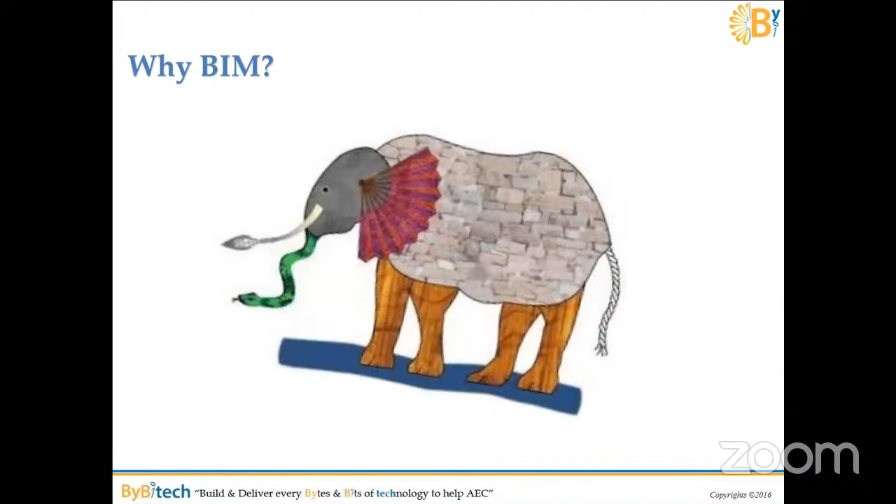So just think about this drawing. If I give you 2 drawings, one is rectangle or square, another one is circular, and if I ask you what is the shape of the object, you need to imagine that one. Then we don't have confidence on that.

So what happens here? Now, when I show the 3D object, then I ask you what is the shape of the object, you can immediately say what that is.

So when we have 2Ds, we imagine everything, we don't have confidence, then we go and get confirmation, or we construct as we understand it. Then at the end of the day, a lot of variation orders happen, we need to update a lot of things. So this is the current situation when we are using especially the 2D drawing without any technology.

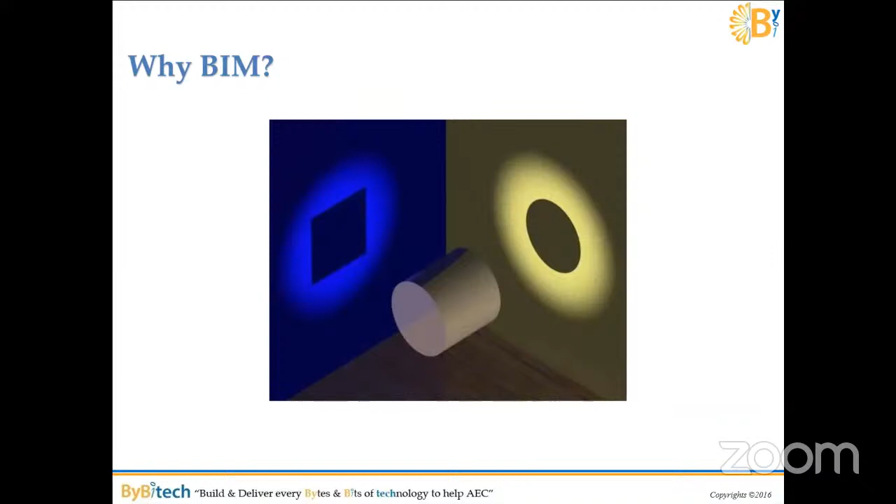Now we are going into BIM. Why do we need BIM? Okay first, what is BIM? Building Information Modeling. So I want to explain the three parts: building, information, modeling.

Okay, building - take it as a verb, okay, not a noun. Buildings, everything is building. Sometimes people say building information modeling. I heard this a few years before - road information modeling, bridge information modeling. Then they decided, okay, building means everything. Infrastructure is also building, road is also building, tunnel is also building. Consider buildings also building - it's not like building only means building.

Okay, so you understand that one. There is no such thing nowadays as road information modeling, bridge information modeling. There is no - building information modeling is a common term. So building means everything, whatever you construct, that is buildings.

Okay, information - so what is information here? Last time, you can imagine the first image is 2D, the second image is 3D. Just understand it that way. So last time I have the 2D drawing, I have the text on top. Then if I move the t-shirt and put it in the $20 rack, it becomes $20. So the 2D is separated - text and the lines, everything is separated. But information now is attached to the object.

So when I'm doing a column, I attach all the information to the column, like properties in 2D, you can see that one. Everything in property - in 2D, you can add the property, but you have to bring it as a text, you need to key it in the drawing. But here, you can add the properties like whatever the information, then you can extract it as a tag.

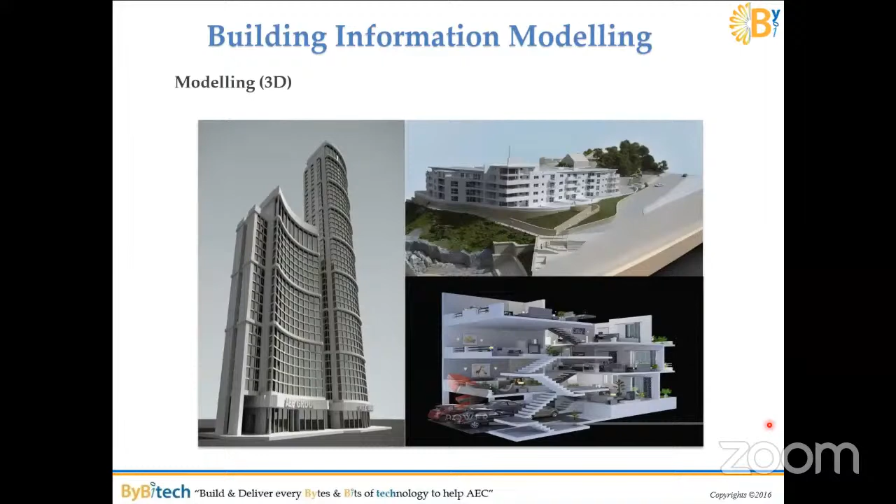So what is BIM? I don't want to go in detail at this moment. You understand high level, then slowly you can refer to some materials and understand more. Okay, it's a new technology. BIM, building information modeling, is a new technology. It's not a software, it's not a product. This is the basic information you should take note.

Something like last time I had a pager, now I have a smartphone. Am I right? I'm not talking about the instruments or the materials, I'm talking about the technology. Same thing here, BIM is a new technology.

It's not like only one. Some people think it's only for the design or only for the construction. No, it's until operation, facility management. So the important thing is, whenever you think BIM, you think about the process.

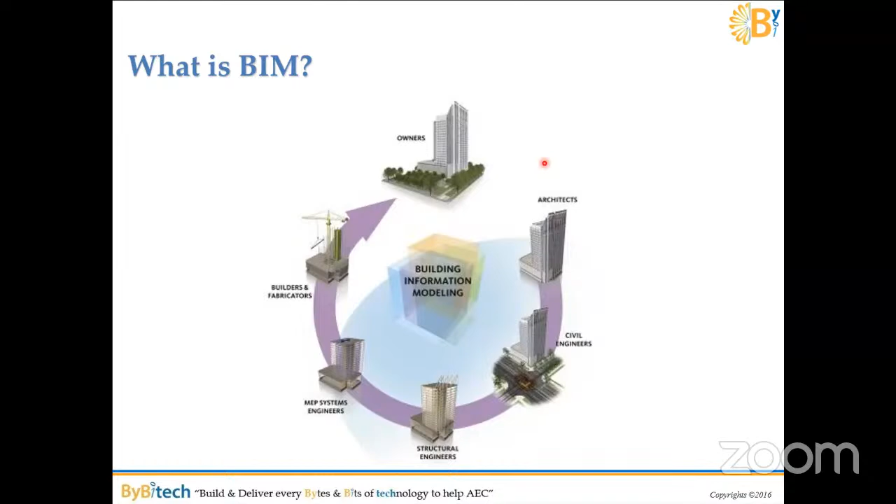So the important thing, first thing you understand, when I draw in AutoCAD, I draw 4 lines. Those 4 lines represent a column, beam, slab, wall, but the software doesn't know. Do you agree or not? Just think about it. In AutoCAD I draw 4 lines, does the software know if it's for a column or beam or slab? So the software doesn't know, for the software it's just a line.

So what I need to do, I have to tell the software, hey, I'm drawing these 4 lines for a column. So I apply a layer. Later, I know, not the software, I know. Correct, so that's why we call it standards.

But now in BIM, we are going to do object modeling. If you understand this concept, it will open your eye, okay, how I can use this BIM. When I click the column and place the column, click the beam and place the beam, click the duct and place the duct, click the door and place the door, whatever architecture or MEP, now my software knows which one is the column, which one is the beam, which one is the duct, what is the area.

First floor, how many columns I have, what is the size, what is the volume. Next week I have concrete for my first floor, so how many columns I have, how many meter cube I need to order, like in a fraction of seconds you can collect all the information from the model. You can extract the information from the model. So that's why object modeling is really important.

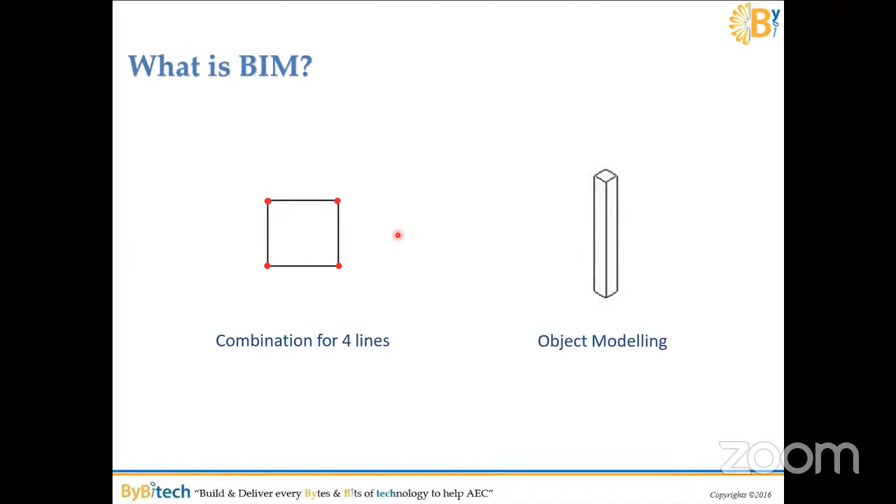BIM is object modeling. BIM is parametric modeling. So remember, when you do the BIM, you are going to do the parametric modeling. What is meant by parametric modeling? Very simple. Control by numbers. What is meant by control by number?

Last time I put 1 meter by 1 meter. Later, I changed the dimension to 1.5, 1.5. Does only the dimension change, or does the size remain the same? Example, last time my engineer came and asked me, Karthik, can you change this 1 meter to 1.1? I won't change the size, I just change the dimension only to 1.1 meter. Then it looks like 1.1 meter. After that, it creates a lot of problems because the opening is 1 meter. The dimension I given is 1 meter, but the dimension shown is 1.1 meter.

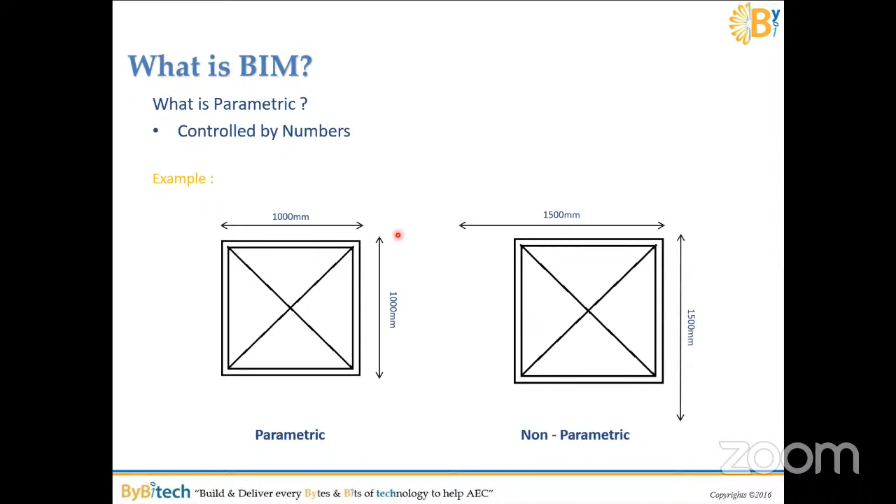But here, parametric modeling means when you key in the number, the size will adjust automatically. So 1 meter, you key in 1.5, it becomes 1.5. Example, you have the level. First floor is 3 meter height. Then for the 3 meter, you want 3100. You just key in the number 3100, the whole first floor will shift to 3100. No need to change anything, just control by number. When you go into the tool, you can understand that one, parametric modeling.

Then CAD to BIM, computer aided design to BIM. A lot of people misunderstand that CAD term also. When I ask what is CAD, a lot of people say AutoCAD. No, CAD is computer aided design. If you ask me, BIM also comes under CAD because computer aided design means everything we are using computer for. So BIM also comes under computer aided design.

Then 3D to 2D is BIM. 2D to 3D is fake BIM. A lot of people doing that one all around the world. When the requirement is a 3D as-built model at the end of the project, they do it everything in 2D, then convert 2D to 3D, which is fake BIM. It's not BIM, okay? When you come out with the 3D model, then extract the 2D drawing from your 3D model.

When you update your 2D, the 3D will update. When you update your 3D, your 2D will update. That is called BIM environment. It's not like I'm doing 2D separately, I'm doing 3D separately. That is not a BIM environment. A lot of places, a lot of projects, are doing this mistake. It's a double job, you are spending a lot of money.

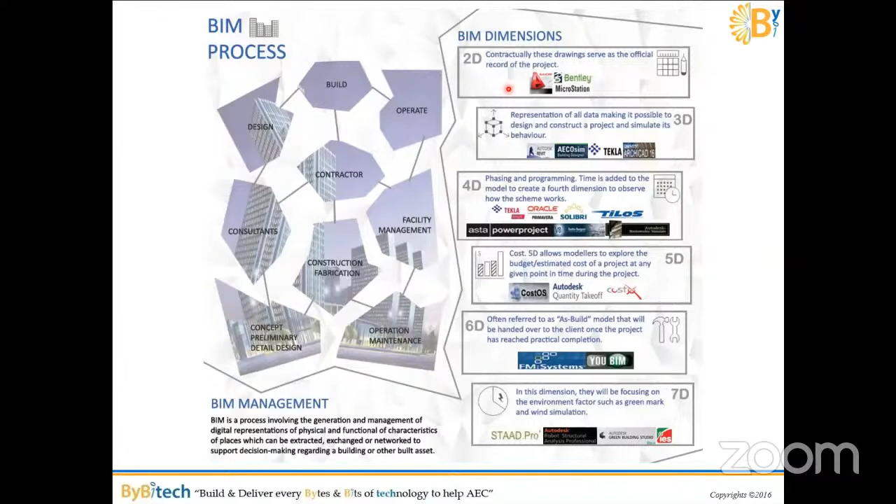Okay, the BIM dimensions are slightly different here compared with Wikipedia. Wikipedia follows the American Institute of Architects AIA standard. I'm just explaining the Singapore standard. So wherever, whichever zone you are working in, whichever standard the country is following, you can follow that one. Okay, slightly different. So for the BIM process, I'll just go through this - I'm not going to take much time.

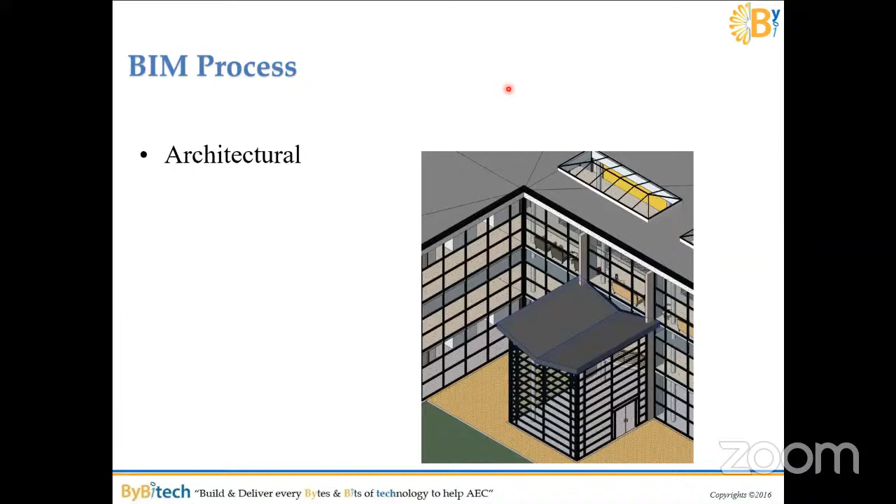Architectural - I come out with the archi model. Structural - I come out with the structure model. Civil - I come out with the civil model. Mechanical, electrical, plumbing, fire protection model. Then this is for the building.

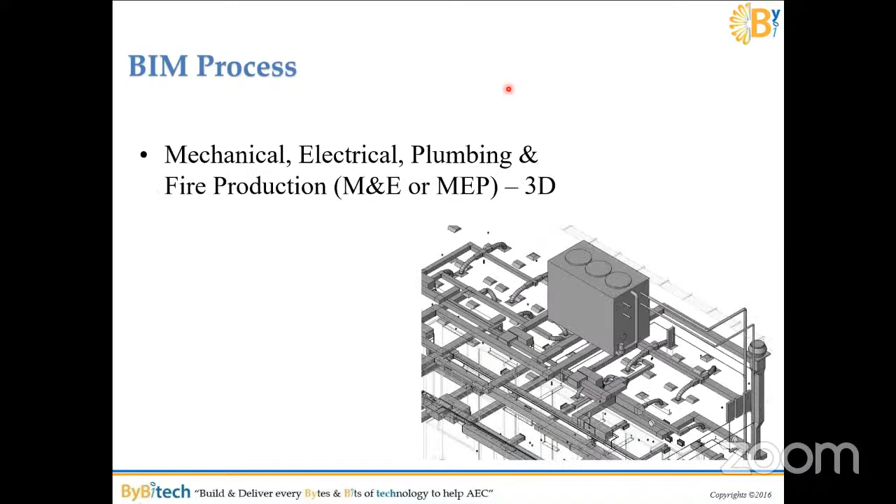Okay, then I come out with the 2D drawings. I can extract the 2D drawings, I can come out with the sections. So imagine if I cut a section like this in 2D, I would need at least 3 to 4 days. Here I just draw 2 lines and the section comes out.

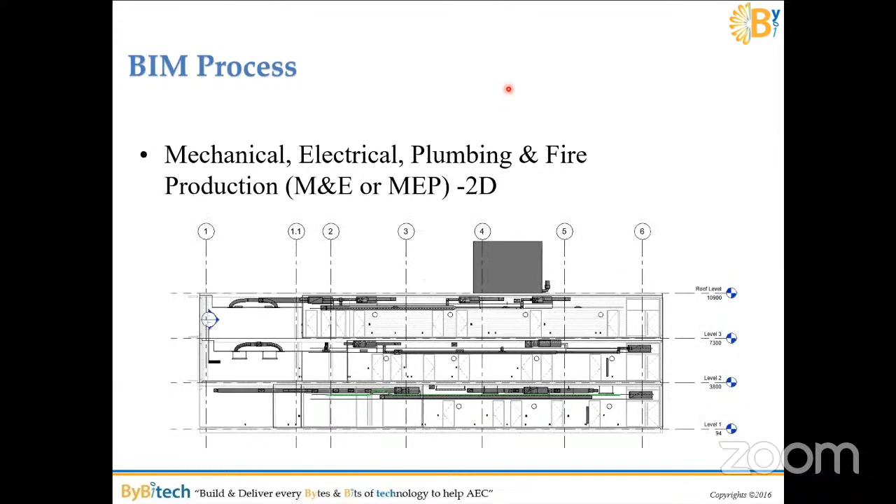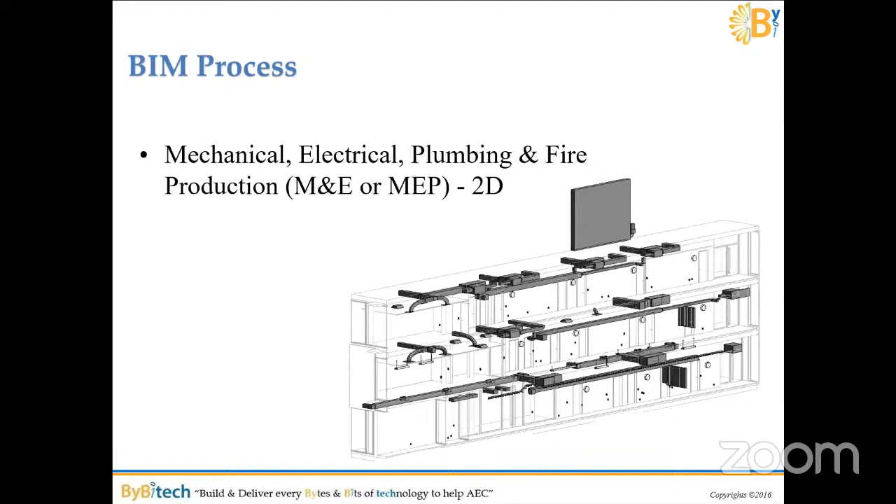Then I show my section in 3D - look here, this is my section. Sometimes people can't understand the 3D and 2D, so straight away what I do is come out with the section as just an isometric view. Can you see this one? This is my section, this is my section isometric view. Now people can understand how the section looks. So I can spoon-feed it - I can spoon-feed my engineers on site. Hey, this one looks like this way, so please construct properly. This reduces a lot of construction mistakes.

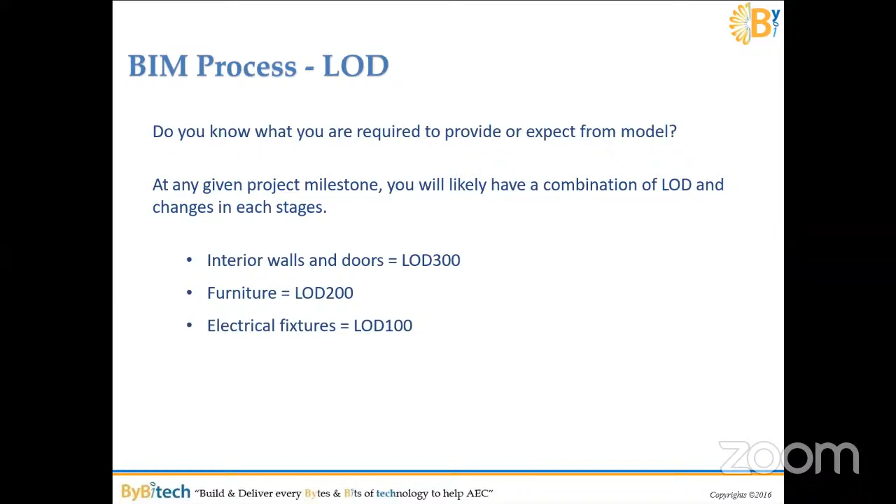Okay, they are talking about level of detail. Level of detail is very simple, no need to confuse yourself a lot. So first I start with the basic one - concept one is just for display. Second, I develop it approximately, that's schematic. Then the detailed one is accurate, everything. Then the detailed one I create is for construction. Then whatever I construct, I create that as as-built. Okay, then I use it for facility management. So people are using LOD - I don't want to confuse you much about level of detail, 100, 300, 400. Later you can learn those things slowly.

Then the process, as I explained - owner, consultant, main contractor, subcontractor, and main contractor. So we just develop the model. We get the requirement and concept model. After that we come out with the architecture MEP coordinated design model. Then it goes to the main contractor - architecture MEP coordinated construction model. Then subcontractor, we split the model to the subcontractor, they come out with the model. Then we do the coordination. Then last one, after we construct, we come out with the as-built model.

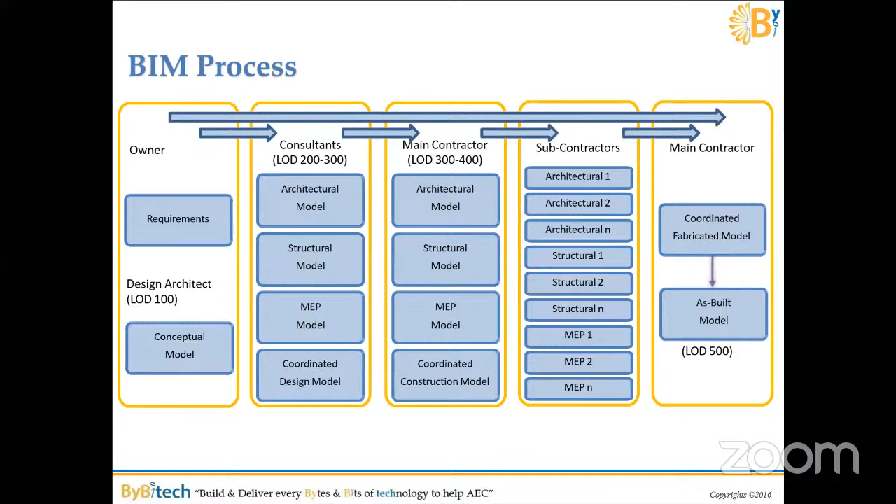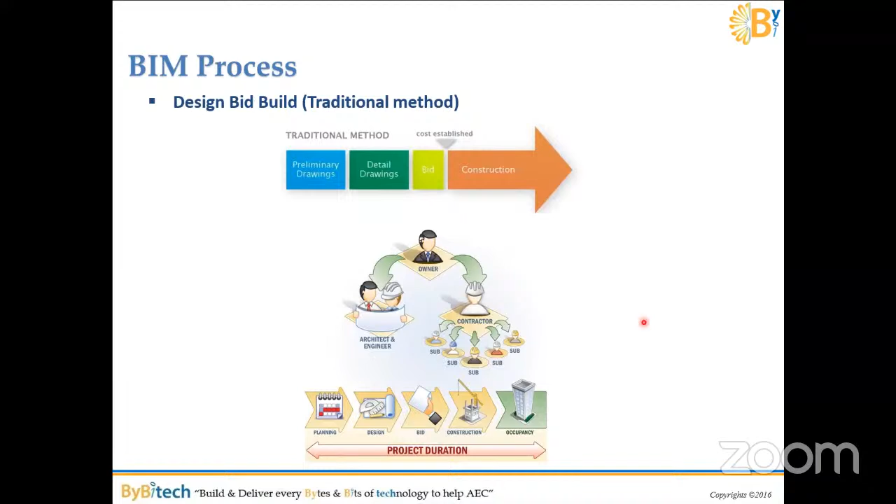Now Singapore is using design and build. So this design and build, what they... Sir, participants, please mute yourself. Okay, yes sir, yes thank you.

So in design and build, you can see here the contractor and consultant come on board at the same time. On board at the same time - so what happens is the construction duration will be reduced. So there's time saving there.

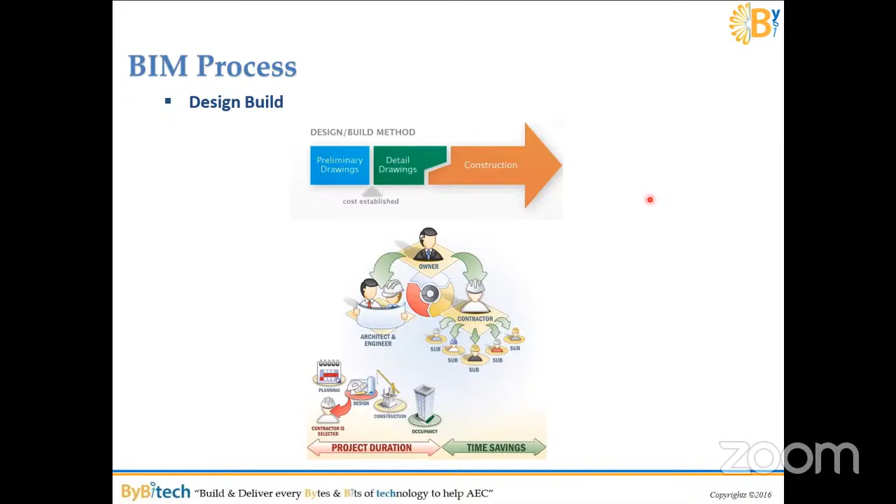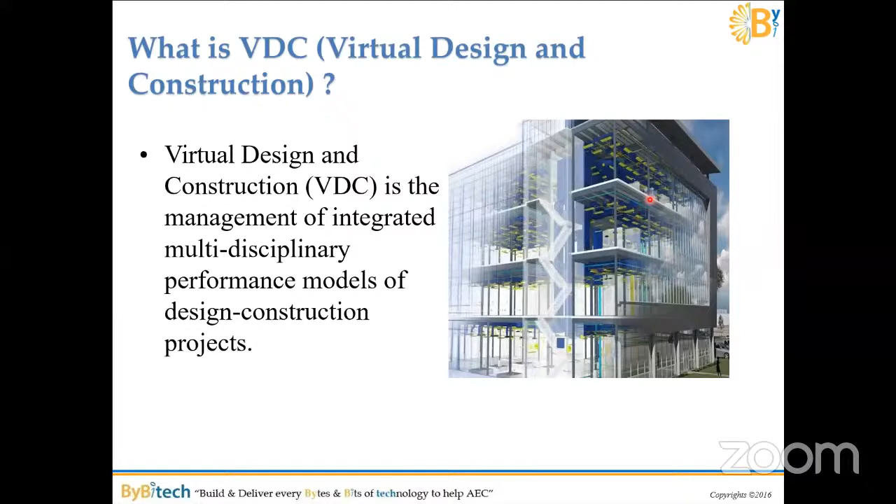Next one, you can see VDC. What is VDC? Virtual Design and Construction. So remember, easy way to understand what is BIM: how I am going to develop the model using the hardware and software, level of detail (LOD), and standard. How I come out the complete 3D model, that is BIM. How I am going to utilize the 3D model, that is VDC.

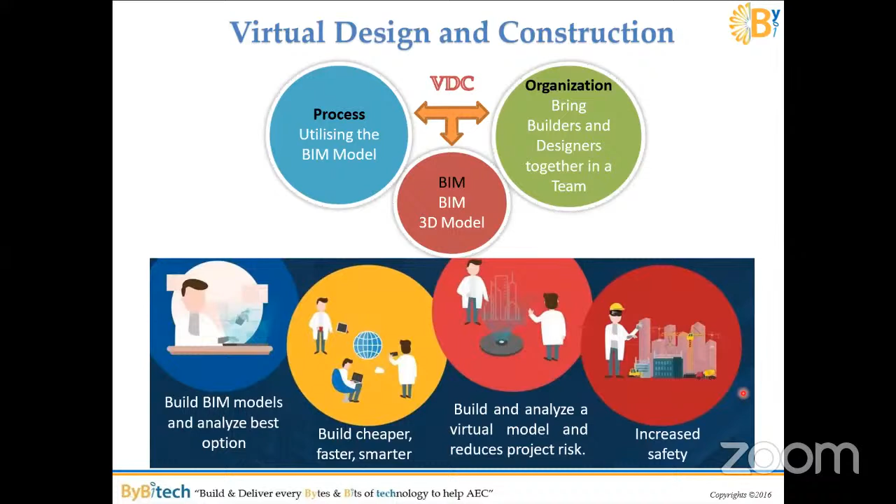So you can see here, the BIM model, under VDC the process, organization, and the BIM model. So the people, how the organization going to utilize the 3D model, for what purpose? Build BIM model and analyze best option, which is 7D. Build cheaper, faster, and smarter. Cheaper is cost, faster is time, so that's 5D and 4D. Build and analyze the virtual model and reduce project risk, increase safety. These are the virtual design and construction after we come out the 3D model.

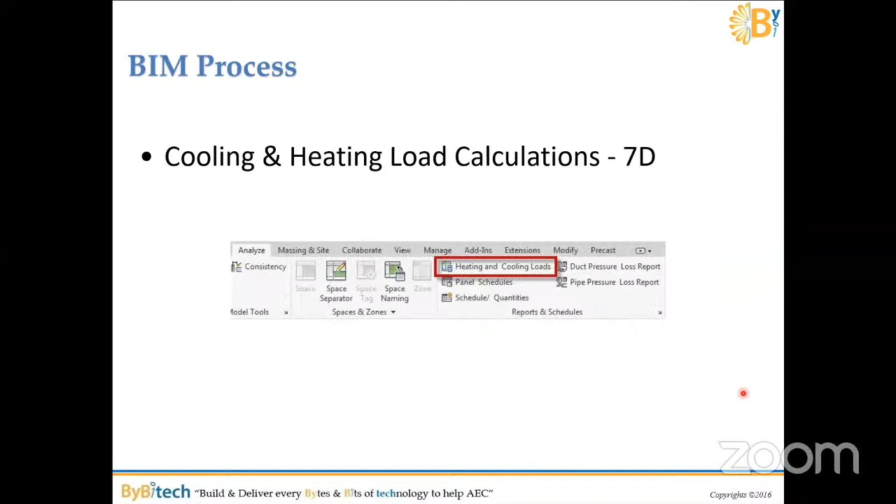Just some example for the 7D. We are creating the space and using the heating and cooling loads, then we can calculate using the 3D model, then come out the report, that's 7D.

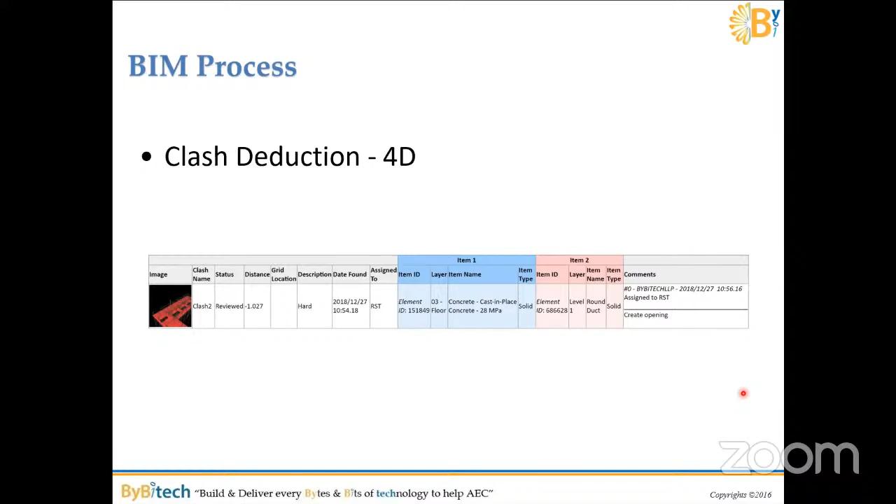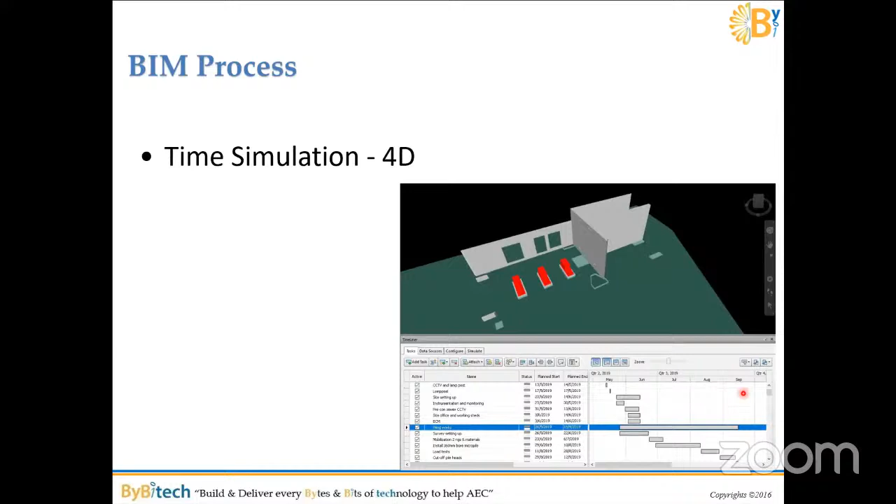Then I do the 4D. I can ask the software to find the clashes, because the software can find the clash and tell you where the clash is, what is the problem, what two objects are clashing, whether I need to create an opening or not, what I'm supposed to do for that. Then the 4D, which one comes first, which one comes second - forget about everything, just remember that. That is the big issue nowadays. Sometimes I do something first, then another contractor comes late and fixes it, but no use for the first one. So these are the things I can visually see, and I can decide which one comes first, which one comes second on a time basis - time simulation.

One second. Hello. Hello. Yes sir, nothing sir, nothing sir. You can carry on. Yeah, I can carry on. Okay thank you. Yes, yes.

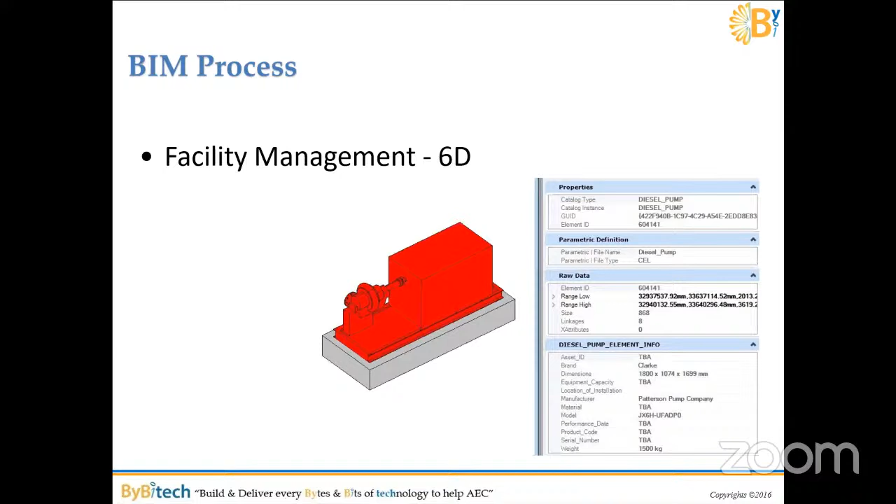The facility management is 6D. Remember the facility management quickly - the ultimate idea of BIM, VDC, and other things is for facility management. Design and construction is just 2 to 5 years or 10 years, whatever infrastructure. But after the construction comes facility management - how many years am I going to do the facility management? The facility management for a building may be 40 to 50 years. For infrastructure it's more than 100 years. So I need to maintain the building - how am I going to maintain it? That is 6D. So design, build, operate.

So the VDC: first understand and measure and quantify, plan and analyze and improve and control. So quickly, VDC is how I'm going to utilize my 3D model to understand, then measure, quantify, then plan, analysis, and improve control. So the last one is IDD, integrated digital delivery.

What is integrated digital delivery? First, understand it a simple way. Now people have got digital delivery - take an example, food. Forget about all these things. Nowadays we are using it for our personal life. We install one app, then we just use that app, ask them to bring the food to home. So how much time do we save? How much money can we save? We no need to use transport to reach there and come back. So this is the thing we can do really fast.

So integrated digital delivery is the way how you are going to deliver the project digitally. So again, I go back - first one, BIM: how you are going to develop your 3D model in terms of hardware, software, standard, and level of detail.

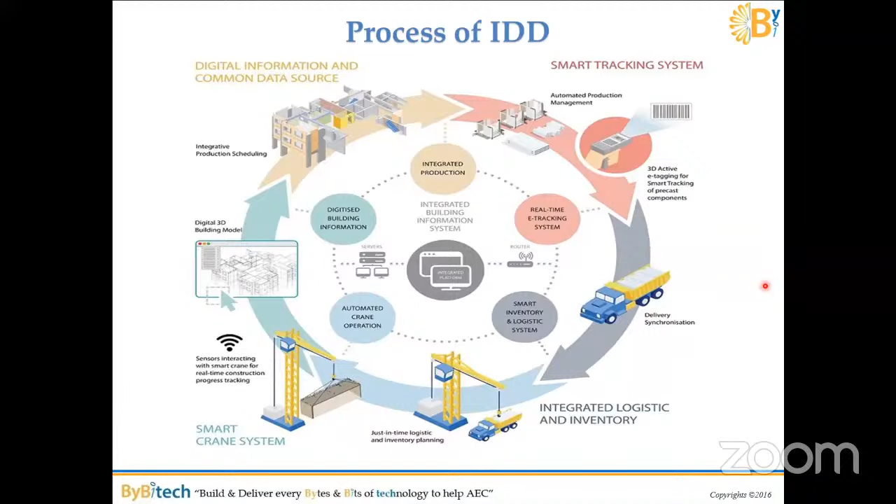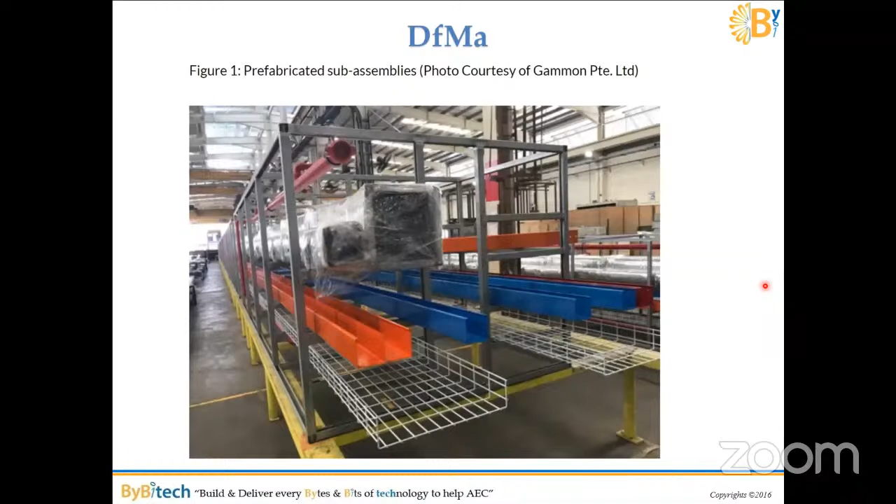Okay, so integrated digital deliverable, this is the key. Using DFMA for structure and MEP, nowadays it's really straightforward when we use IDD. So IDD is digital design, digital manufacturing, digital construction, digital asset delivery and management. Okay, so this is a quick teaser for your BIM, VDC and IDD.

Also we are talking about common data environment, a quick topic I just want to highlight. It's very simple - people nowadays use Google and other tools, Microsoft also. Meaning, you have a Google Sheet, you created it, you can ask someone to see it from anywhere, then they can amend and you can amend at the same time. So that is a kind of common data environment.

Nowadays we have started using the same kind of common data environment using Autodesk Construction Cloud or Bentley ProjectWise. A lot of tools are available for that - Trimble Connect, a lot of tools. Meaning the whole project team works together in one place, even though sitting anywhere. Now my teams are sitting in India, Philippines, Vietnam and Singapore, but they are working on one project using the common data environment. It's a server, kind of cloud server.

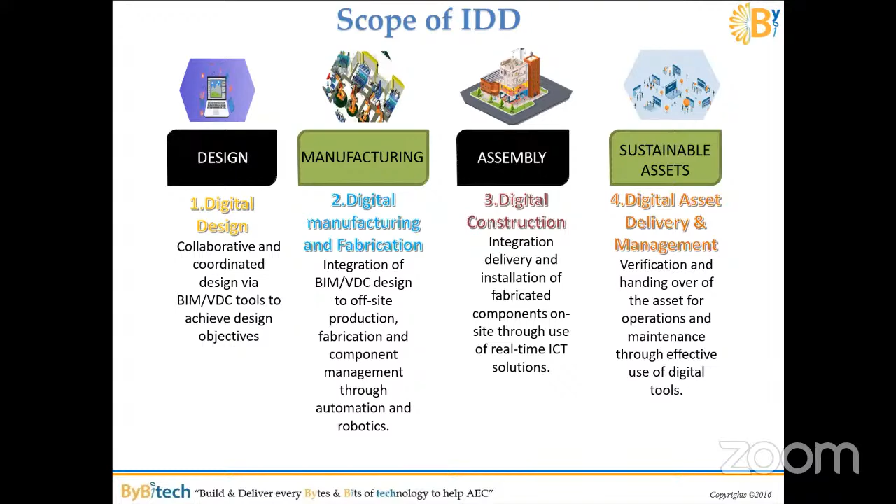So it's really easy for the authority to visualize whatever, very fast, for them to understand the project, instead of imagining from the 2D drawing. Okay, any questions?

BIM modeling courses - if they are MEP, let them learn BIM modeling MEP. Or VDC coordinator, they can learn software like Navisworks or Navigator. If they want to do management, then they can go for VDC buildings, VDC infrastructure, quality management, or cost control management. These are all under VDC, not quality control - it's VDC quality control.

Then diploma also there, a lot of places. Even we are also doing architecture, structure, HVAC, all under BIM and VDC - specialist diploma in BIM, specialist diploma in VDC and IDD. There are a lot of courses, so you can connect with me if you have any doubt.